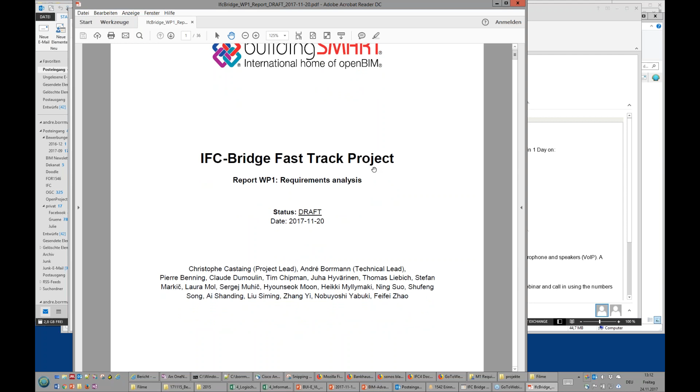Sorry, so this is the document that we have created as a result of work package 1, the requirements analysis. We have worked on it throughout the last month, so it's still changing, as we take into account the feedback that we are receiving, also from you as the expert panel. We are still in a draft mode, but we hope to finish this report very soon.

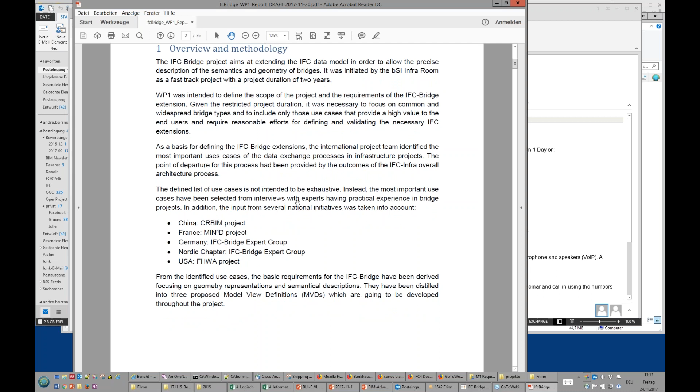So first, the document talks about the methodology and the overview of the IFC Bridge project. It talks about the different national initiatives used as a basis for this international project, both from the viewpoint of developments regarding the express schema, but also with respect to organizing feedback for developments that we have developed here.

We then define the bridge types covered by our project here. We focus on slab bridges, girder bridges, frame bridges, rigid frame bridges, and culverts. We believe that our extensions will also be sufficient to describe truss bridges, arch bridges, cantilever bridges, cable stayed bridges, and suspension bridges. However, because this is a fast-track project with limited time and also limited resources, we decided...

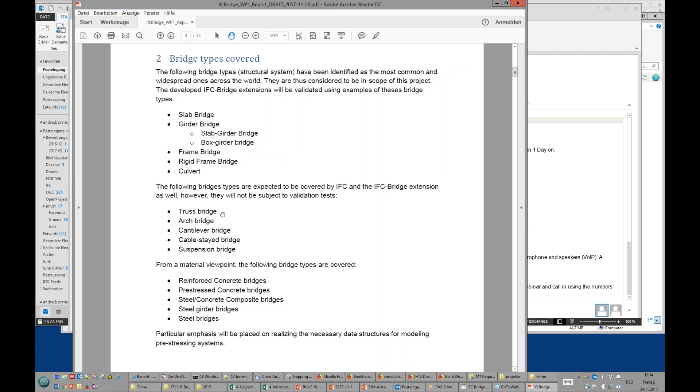...to not do validation tests for these kinds of bridges. So these bridges here in the upper part, we will create validation test examples to show that our extensions are able to support this kind of bridges, but not for the lower ones, because these ones are also not as widespread as the ones above.

So, from a material viewpoint, we will support reinforced concrete bridges, pre-stressed concrete bridges, steel and concrete composite bridges, steel girder bridges, and steel bridges.

Then we have quite a comprehensive list of use cases. These use case tables have a number, the use case as a short description, the purpose, so why do we need this use case, the actual IFC exchange scenario, so who is sending IFC data, who is receiving IFC data, which applications, and then a short and quite rough description of the geometry representation required and the required semantic information.

So of course, especially with respect to the semantic information, this is by far not complete. In the end, we will have a very fine-grained list of this information for individual elements in our bridges.

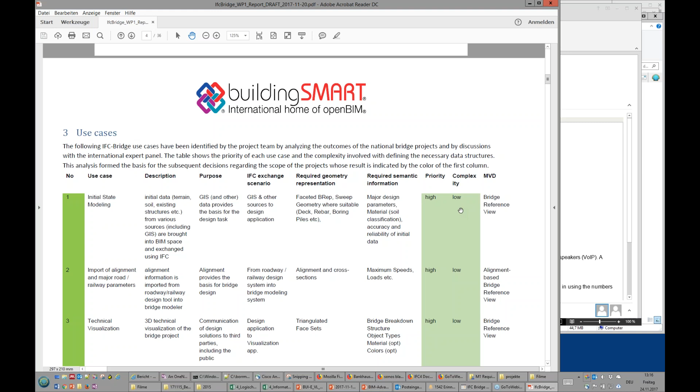This is to just define an overview of information that is required here. We then have decided on priority, so will this be included in this project or not. If the priority is high, then it is most probably included. We also assess the complexity of the different use cases, especially with respect to the required extensions and also with respect to the geometry needs. And from these two fields, actually, the decision is taken whether to include the use cases in this fast-track project or not.

What we also have in the table is the proposed MVD. I will come back to this later on. But in general, the MVD will be a model view that we define within our project, which then has different demands with respect to what kind of information is supported by the receiving application and the writing application. Like, for example, alignment is a specific extension of IFC, and whether to demand support for alignment or not heavily depends on the use case. So we here make use of the MVDs that we describe later on for each individual use case.

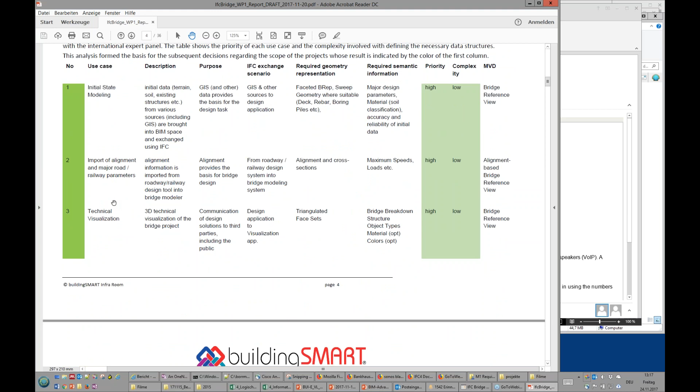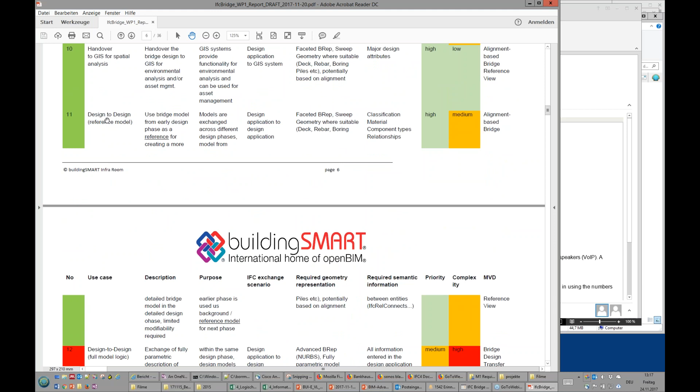So what we have as use cases is initial state modeling, import of alignment and road or railway parameters, technical visualization, coordination and collision detection, 4D construction sequence modeling, quantity takeoff, progress monitoring, as built versus as planned comparison, handover to asset management, handover to GIS for spatial analysis, design to design, but here only as a reference model, so something that is not modifiable is included. Design to design with the full model logic, including all the different parametrics and dependencies, is not supported because the complexity is too high. Design to construction is included with medium complexity, but high priority.

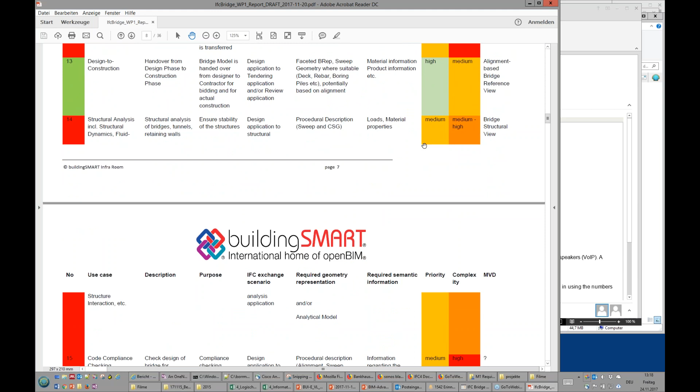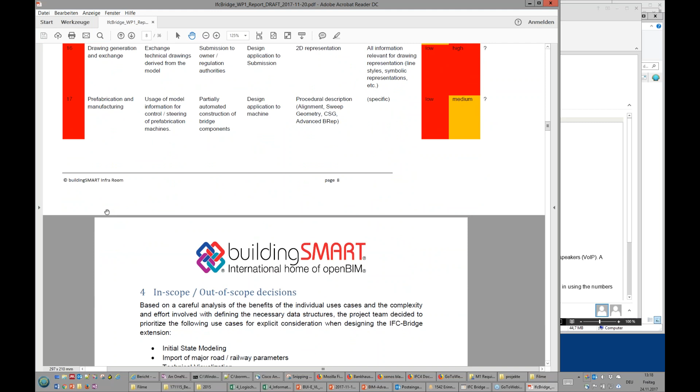We are not including structure analysis because here the priority is medium and the complexity is medium to high. Also, code compliance checking is not included. Drawing generation is not included. Prefabrication and manufacturing is also not included here.

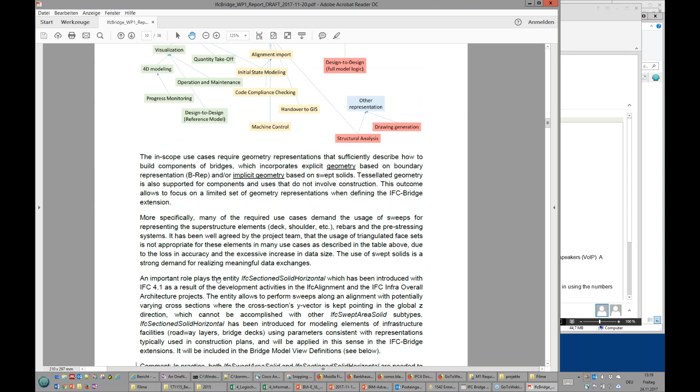So in the next part, the in-scope and out-of-scope decisions are kind of explained in more detail. And then we have a section on geometry, and we explain what kind of geometry is required for which use case, how the dependencies are, and what exactly for example the use of sweeps means with respect to the geometry to be supported, like IFC sectioned solid horizontal, or swept area solid, and so on.

So the next is the definition of the model views. Here we have defined, as I said before, 4 different model views with different demands regarding mostly the geometry, but also the semantic aspects. The most basic one is the bridge reference view, which will be very much aligned with the IFC 4 reference view, which has only explicit geometry, which supports mostly the use case of visualization and coordination and quantity takeoff. So this is also usable here.

In addition, we have defined the alignment-based bridge reference view. This reference view will make use of alignment for positioning and orientating of individual elements, but mostly will still make use of explicit geometry to describe the surface of the different elements. Then we have the bridge design transfer view, again very much aligned to the IFC 4 design transfer view, but here again with support for alignment.

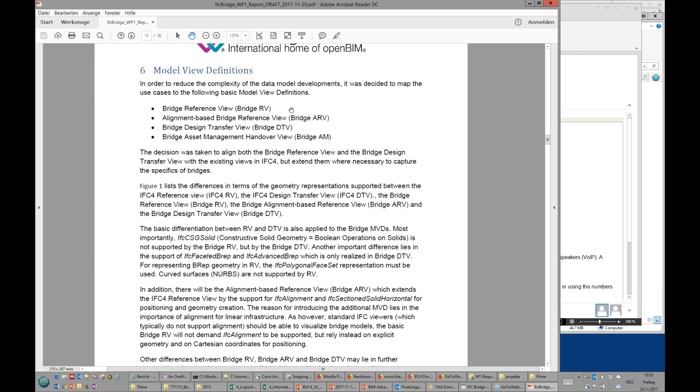And finally, we have the bridge asset management handover view, but here we did not define yet the content, so this is something we will have to work on in the future. This part here describes what actually is included in the different views. I will not go through this because we do not have that much time today, but of course you have this, it was distributed with the document.

And then we have this table here, which shows you, well, I would say the most important components of the different model views. Most importantly, we have here the already existing IFC4 reference view in white, and IFC4 design transfer view also in white, and in orange the newly defined reference view for the bridge, the alignment-based reference view, and the design transfer view. You can see that the reference view is pretty much aligned with the IFC4 reference view, and the bridge design transfer view is aligned with the IFC4 design transfer view. However, we have some differences here, for example, with respect to IFC sectioned solid horizontal, which is supported by the alignment-based reference view, but not by the bridge reference view.

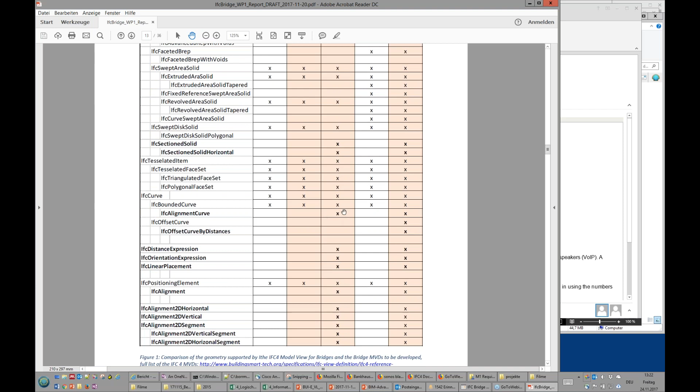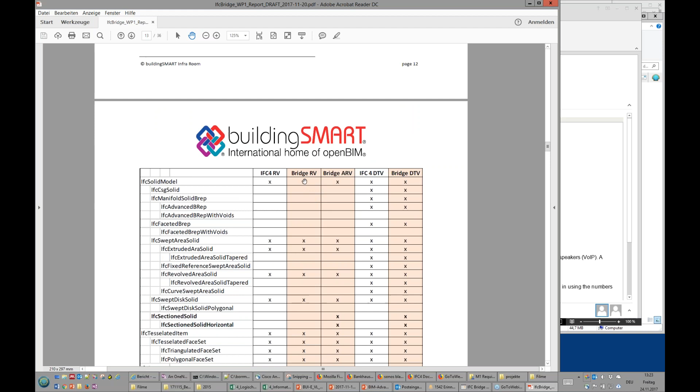So here we have a difference, and of course also a difference with respect to the alignment curve, the distance expression, the orientation expression, and the linear placement, because these are all elements required for alignment-based geometry descriptions. The alignment itself is only supported in the bridge alignment-based reference view, but not the reference view. So you will be able to open and visualize our bridge models in the bridge reference view, also if you have a conventional IFC viewer which is not capable of supporting alignment. This is important to have this kind of downwards compatibility with existing elements.

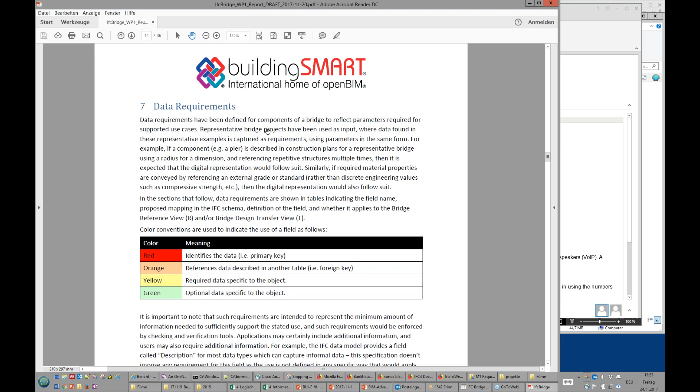Then we have a very long section about data requirements, where we started to identify for individual items what are the requirements for the different components of a bridge with respect to the different attributes. We use a color scheme where red means this is the primary key of an element, orange means a reference to data in another table, yellow means required data specific to the object, and green means optional data. So let's have a look at this.

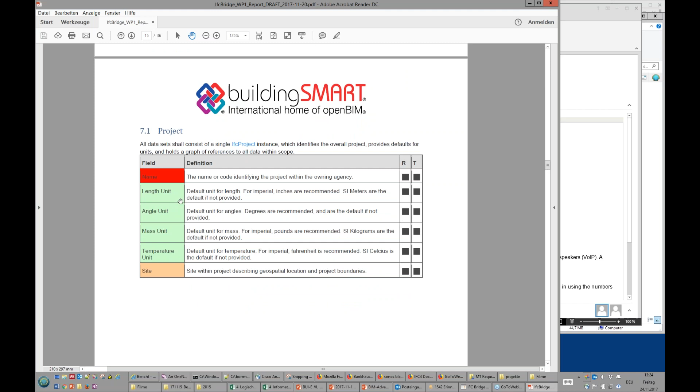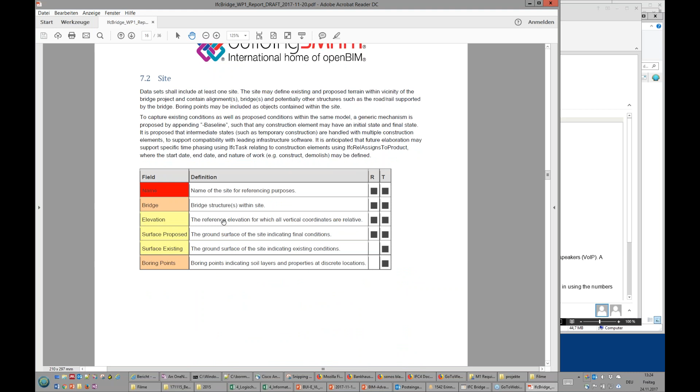We have here the project with a number of green elements and also an orange element. Green means optional, orange means reference object. We have the site object, which has the elevation, the surface proposed, and surface existing as mandatory elements. We have the alignment itself, the bridge itself, the piers and abutments, the footing, the pile, the bearing, the girder.

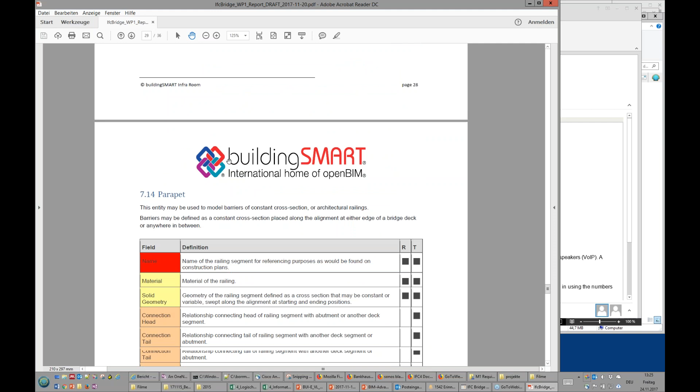Segment, the cross frame, and the deck segment, the parapet, electrical box, the rebar array, and the rebar shape.

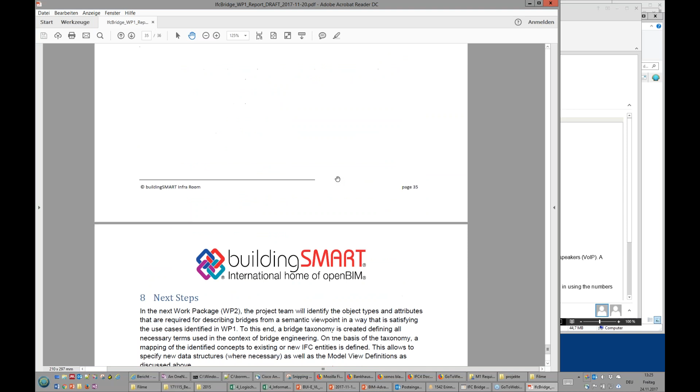We will also include, this is not included here, but we will also include information about pre-stressing systems. It's not in this version, but it will be part of the next version. Then we have the soil boring point and material information, traffic lane information, and that's it for the moment. We still need to harmonize this view with the taxonomy we have already created for work package 2. So it's not yet completely final, but it gives a good overview of what has been done so far and the requirements we have defined so far.

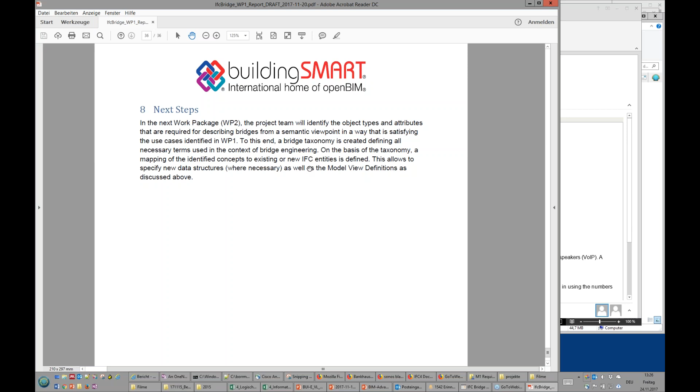So the next step will be to use these elements we have defined here and go forward to define the model view definitions and the actual extension in more detail as part of work package 2. Okay, so this is the short overview of the requirements analysis, and I'm happy to answer any questions that might arise about this.

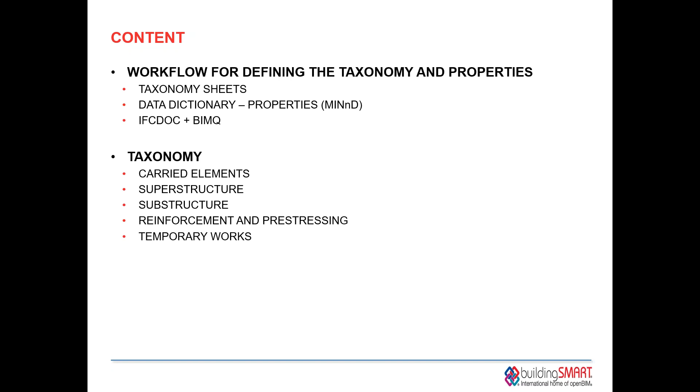We did receive some feedback on this from the Japan chapter and from the Nordic chapter already. Thank you for that, it's very good input. But even though we are currently not yet considering the systems or spatial structures or whatever should be used, in the end we will definitely be using feedback for that also.

So let me just jump over quickly how these things look like. We had taxonomy sheets, we have the data dictionary from the MINnD project, and then we are using IFC doc for concept template definitions and for documentation generation, and we're also using BIMQ as the platform where we will map the elements from taxonomy that I will be showing next, and IFC entities in the end, which will be then also used to generate an MVD XML and used as a basis in IFC doc to generate the documentation.

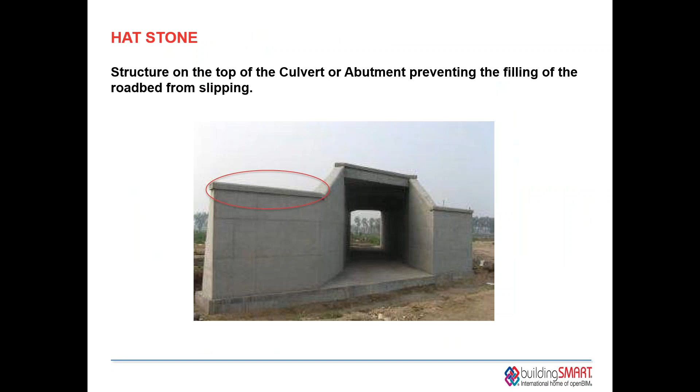I'm sorry about that, my computer just went crazy. In any case, let's just start again here.

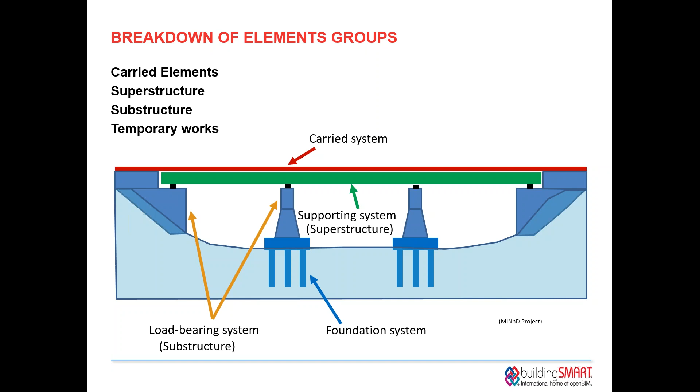How we see the breakdown of elements in groups is approximately this. We have a carried system, which is not part of the bridge structure, so should not be covered, is out of scope of this project. And we have a supporting system, the superstructure. We have the load-bearing system, which is the substructure, and we have a foundation system. This is taken from the MINnD project. It's by no means a final version of how an IFC file should look like, but it's definitely useful to be considered as such.

So let's go to carried elements. At first, as I stated, our in-scope definition would be something like this. The bridge is a structure built to span physical obstacles without closing the way underneath. So everything that can be grouped under this basic definition is in scope from our point of view. Anything that does not fit into this basic definition should be out of scope.

So anything like sign systems, safety systems, drainage, carriageway, and so on is not in scope of IFC bridge. It's definitely needed for IFC bridge, but we should look to other projects to define this or use the existing schema to define these carried systems.

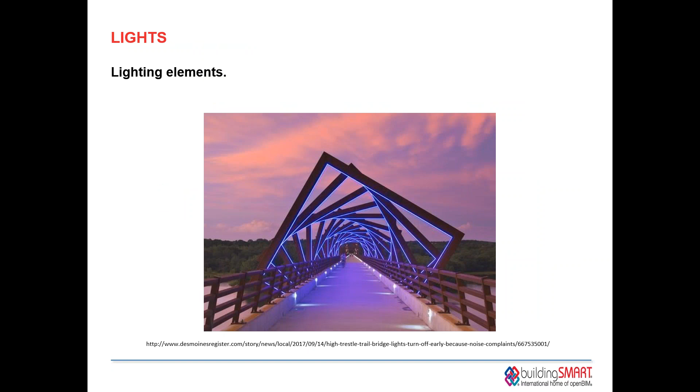I have a few examples here. It's something that should be used in the common schema project also, so we're happy to transfer this information to the common schema later. But before we start with this one, this is what I was looking for.

With a superstructure, let me just address the survey we had sent out. So we had a special survey, and we got some information regarding that, where we basically just asked you experts of what you actually want from a bridge model. What objects do you see as part of a bridge model? These were then defined here in this presentation as pictures and a short description, and you were asked to give us feedback if this is something you see as part of the bridge model, or if you see it as part of the common schema, or part of the road, part of rail, and so on.

Because this is something that will be used to define our extensions to the schema eventually.

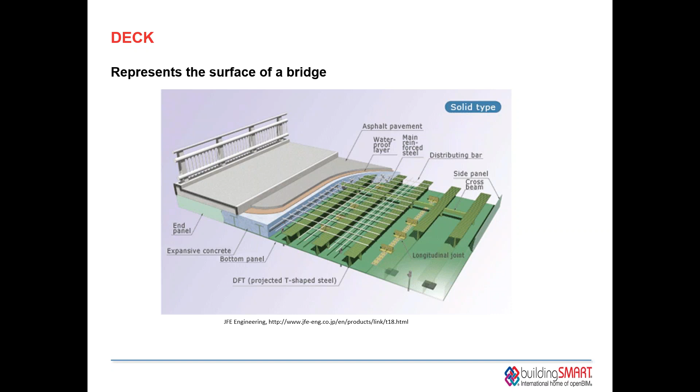This next part, I would like some input from our experts, where Laura will start a poll. We will look at the elements there, and you just click on the ones you see as part of the bridge model when you're receiving data. What do you see as the objects that should come in this model?

So did we start the poll? Yes, every expert should be able to see the poll now. Can I see it also, or am I missing something? Maybe, I'm seeing it, but it could be because I have different rights than you. Okay, but I can let you know. They're giving their answers now.

Which objects do we have listed in the first poll? Deck, girder, diaphragm, truss - I'm not even sure how to pronounce that last one. Parapet? Yes, parapet. So these are the first five I would like some feedback on.

So a deck represents the surface of a bridge. Girder is a horizontal support beam. Diaphragm - some feedback from the Nordic chapter told us that we might want to rename it to cross beam. So either diaphragm or cross beam, whatever suits you best, as long as we know what we're talking about.

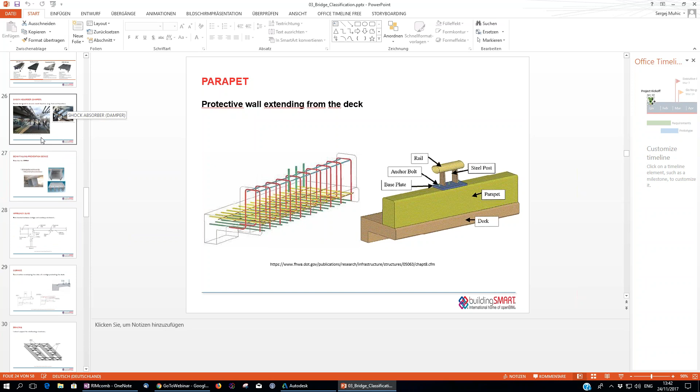Okay, so we're going on to the second question by Sergej, and it would be about expansion joint, shock absorber, beam falling prevention device, approach slab, and cornice. As soon as I launch the poll, it'll take over your screen. So do you want to go through it first and then answer the question? Yes, let's go through it first.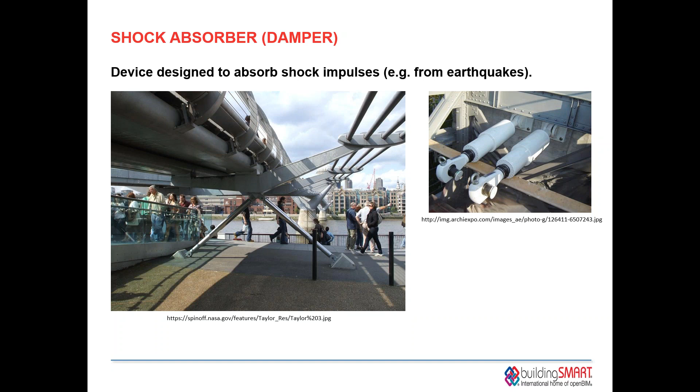What we would like to know here is, do you see an expansion joint, which would be, from our definition, an assembly connection between construction elements to allow for thermic differential expansions? The shock absorber damper - we're still considering this because we already have some special elements designed for that, how to group them or what the super class should be regarding this. So the device designed to absorb shock impulses.

Beam falling prevention device - I guess it's a device to prevent the falling of beams. Slab located between bridge and roadway abutments - we already have some feedback from the Nordic team on that also, which would be that it should be grouped under substructure, since it's a part of abutment. Not that important currently, but definitely important when we continue with the project. And the last one was cornice.

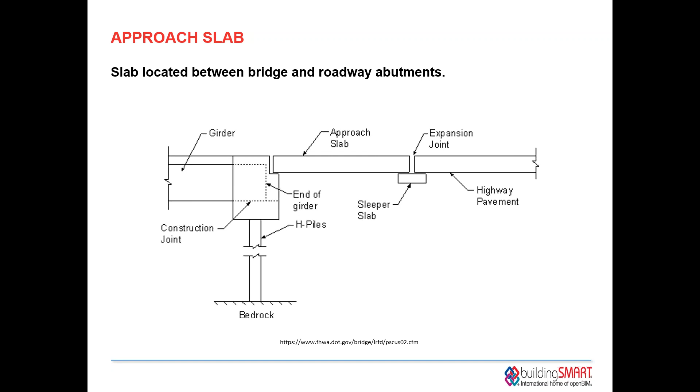And the last one was cornice - this bridge shoulder part, or how to call this exactly here. And I would just start the poll. So do you see these elements as part of the bridge model or not? Let's just open the poll. The poll has been launched.

So please, could you let Sergej know if information on these elements would be needed when you receive a file on bridges? People are filling it out, about 17% have voted. Let's give them a couple of minutes. I will leave the pictures open here, maybe make it bigger.

If there are any questions, we can probably still answer them during the poll, right? Yes, of course, so you can also raise your hand if you have questions. So if you're not certain about an element, please ask.

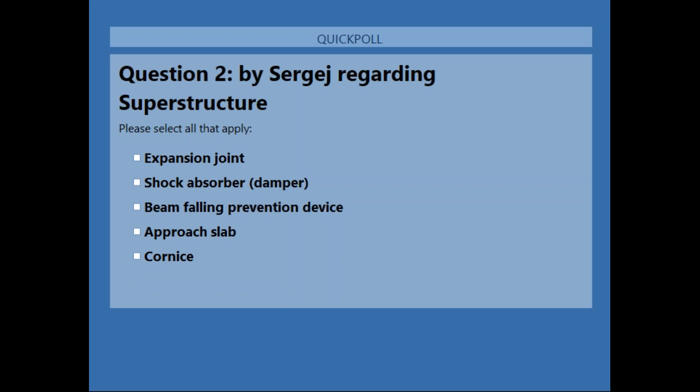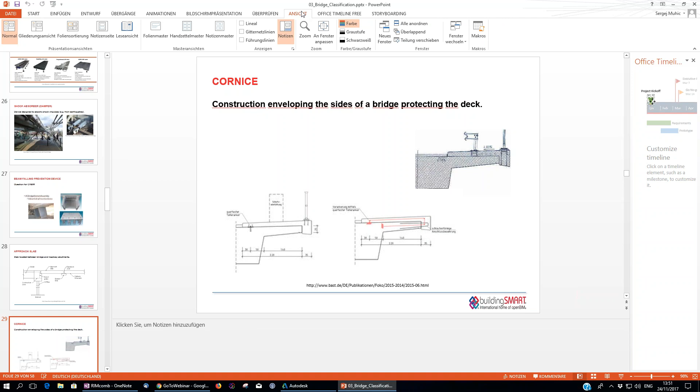The third poll is about bracing and strut. Is there someone in your background talking, Sergej?

Yes, there is. I'm sorry for that, but I cannot remove myself from the office. It's okay, I was just wondering where it was coming from. Don't worry, just a second. Okay, so cornice and brace—no, we had bracing and strut, right? Sorry, yes, bracing and strut.

Looking at bracing, this would be lateral support for structures generally, and struts, linear elements used within a girder or truss as compression elements. So these would be these diagonal compression elements over here. Would you see these two elements as something you'd want from a bridge model when you receive it, or is it not important?

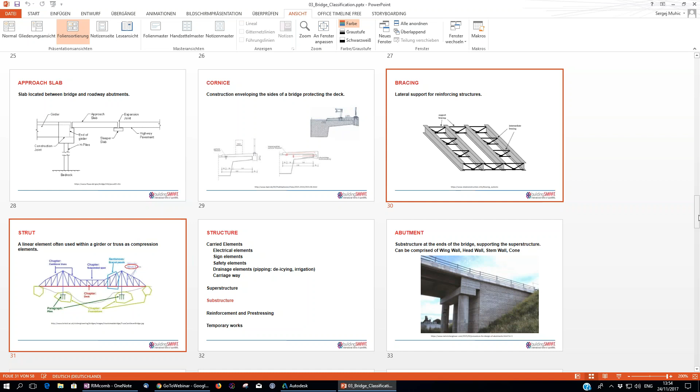So the next ones are about abutment, retaining wall, bridge apron, arch, and bearing. Abutment through to bearing.

So let's quickly go over the elements here. Abutment: substructure at the ends of the bridge supporting the superstructure, can be comprised of walls, basically wing walls, head walls, stem walls, and also cones. This would be more or less an assembly of different walls acting as the support at the ends of the bridge.

Going further to retaining wall, this could also be a separate element, of course, and it works a bit differently than a normal wall.

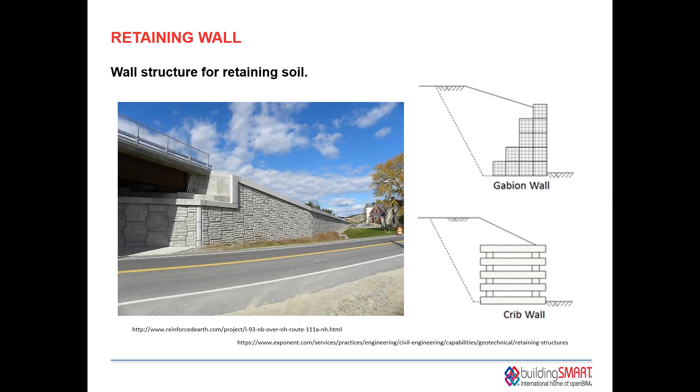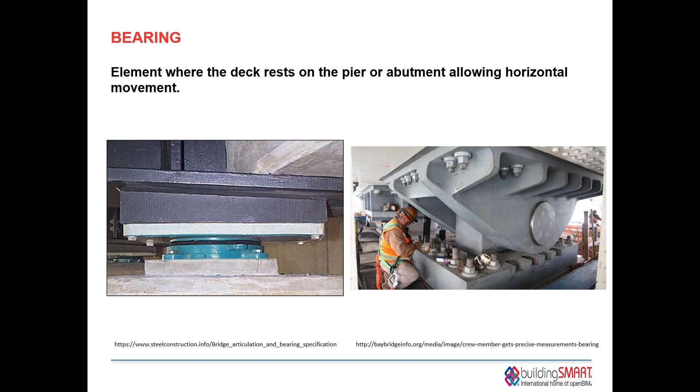And we also have arches, which would be structural elements of an arch bridge. And the last one, bearings: elements where the deck rests on the pier or abutment, allowing not only horizontal movement, but movement in general.

So the question here again: when you're receiving a bridge model, do you see that these 5 elements are required, or do you not need them when getting a bridge model?

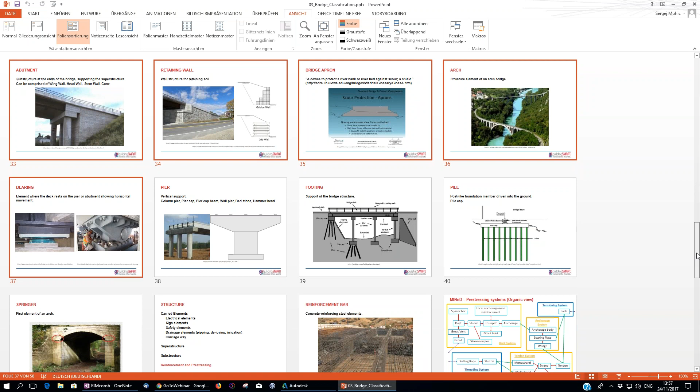Would you like me to share the outcome of it, just to show everyone what it looks like? Sure, why not. So I don't know if you can now also see it, Sergey. Has it taken over, or? Unfortunately, I don't see it. Can you stop sharing your screen for 1 second to see if that would help? Let's do that. I cannot really stop sharing my screen. I only have a pause button, but that one just freezes the screen. Let's not make it difficult.

Continue. So the next elements are pier through to springer: pier, footing, pile, and springer.

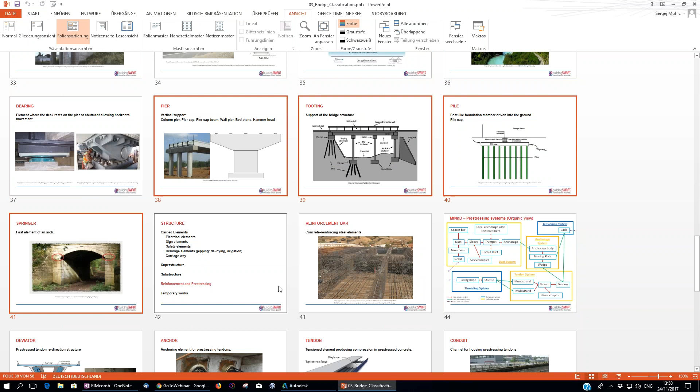Let's go over these elements again quickly. Piers, what we understand as piers, are vertical supports. Elements that we see also being part of the pier are cap beam, wall pier, bedstone, and hammerhead.

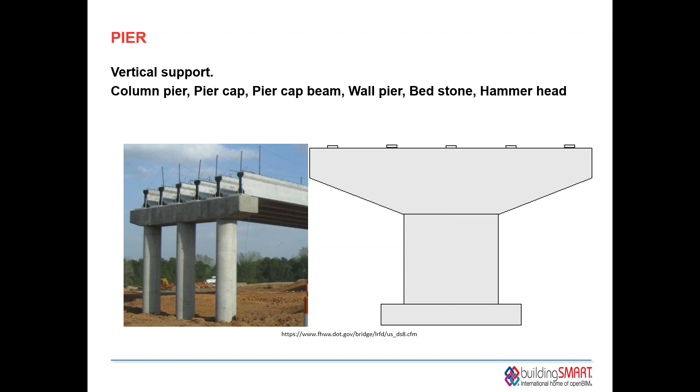Next one, footing. This one's pretty obvious, support in the ground usually. Then we have piles, which would be foundations driven into the ground, so deeper than normal footing, and we also see pile cap on top of them to connect them.

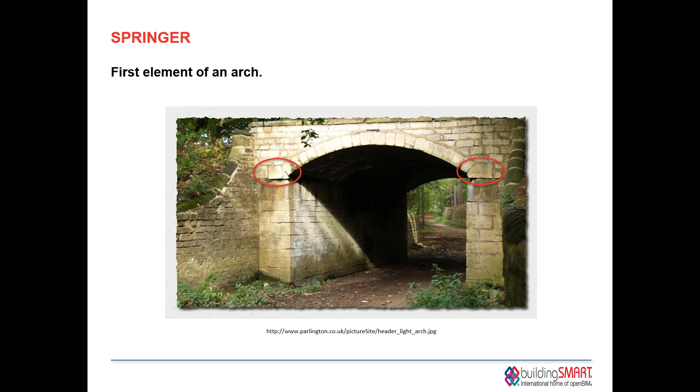Next, springers, which would be these elements here, the first elements of an arch. I'm not sure if these are still in use in modern bridges, so this is definitely something I would like to see some feedback for. Or if they are, then I would appreciate getting some feedback in images or maybe breakdowns of how these elements are structured, because I really haven't found anything useful on the internet apart from this old bridge here.

So again, the question is, when you're getting a bridge model, do you see these elements as required? Do you need information on them or not?

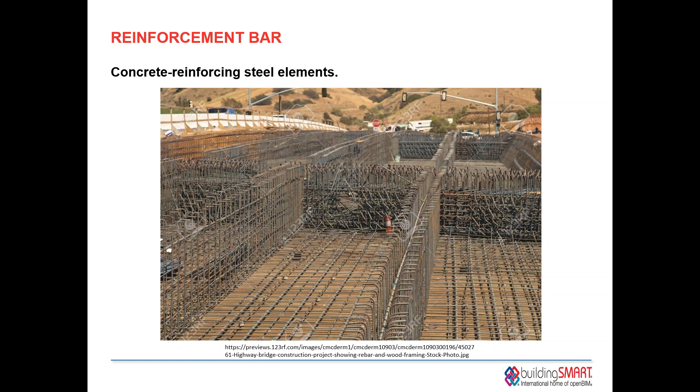In this group, the reinforcement and pre-stressing group, I mainly gathered elements that are used in reinforced concrete or pre-stressed concrete. There are, of course, probably several more. That's why we also had a breakdown in the next image, which I will show. Reinforcement bar, these are obvious, I won't go into further detail, but this image here, for example, is a lot more complicated.

Thanks to MINnD again for this breakdown, it's very detailed. But just to have an overview of how detailed pre-stressed systems could get, would you require this kind of detailed breakdown when receiving an IFC file? This is the main issue here. So for pre-stressing systems, just having this extremely detailed breakdown, is it necessary or not?

Just a general question, yes or no. And if you say yes, then I would ask you to send me your view of how detailed a pre-stressing system should be. Because what we do have is, okay, these are special elements for pre-stressing, so deviators where we redirect the tendon with a particular structure.

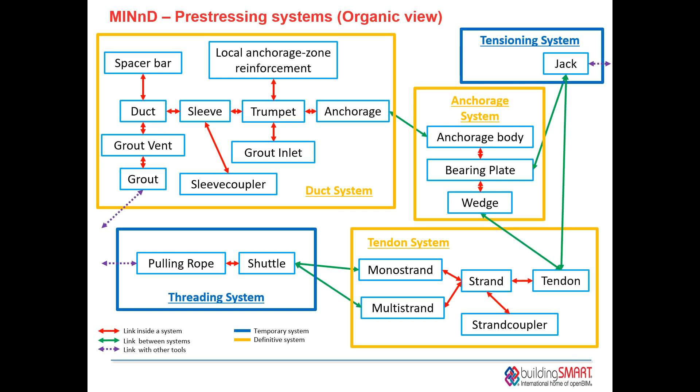Then we have anchors. For example, this would already be possible to model in the current IFC schema, but is it enough to just have anchors and tendons, or would you really like these detailed breakdowns in a bridge model? This is a very important issue, and if you really see such a detailed breakdown to be of benefit, please tell me what your view of this would be.

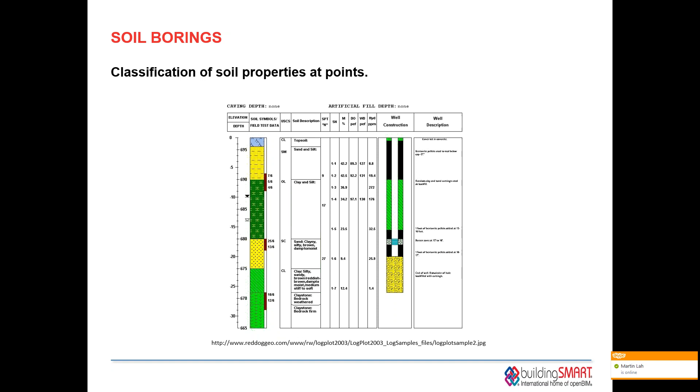We can launch. Okay, it's already open. Sorry. No worries.

I think even if someone has different exchange requirements than what we're looking at here and doesn't leave out the question, I think we should still have a firm grasp of what's required and what's not.

We're up to 63%, and not everyone might vote on this because it's not as important for everyone, as you said before. Right.

Unfortunately, these polls in GoTo are not as flexible as the ones we sent out before, where you can leave your own comments. So it might not be the best outcome, but still better than nothing, and any input will do. They do have a questions panel where they can add questions, and you also have a chat. So if you want to provide any other feedback, please feel free to do so.

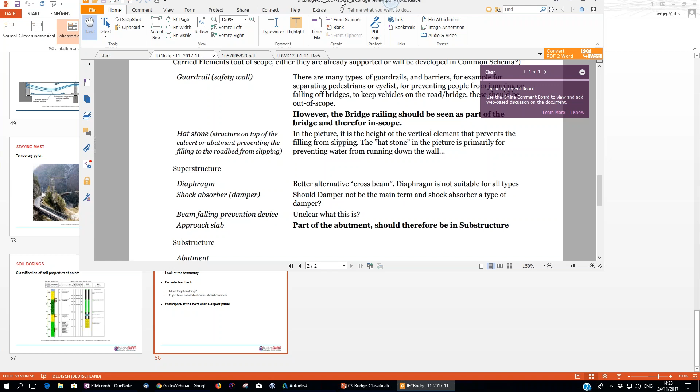Where they specifically go into certain elements, give us feedback, and if there's anything we should consider, we will definitely do so. We will study every documentation sent, every report sent. So don't be shy - send us everything you have.

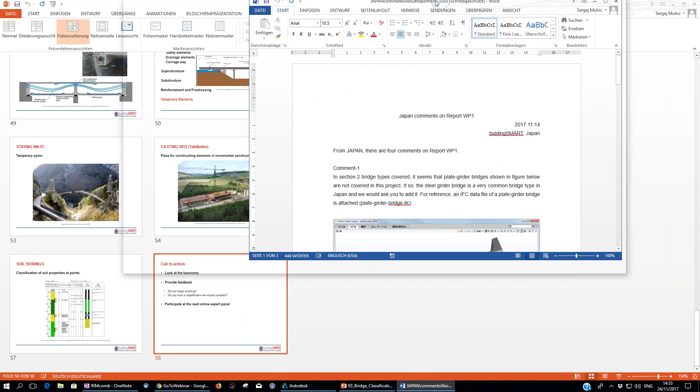There's also a report from the Japanese chapter they sent, regarding the requirements report - we'll definitely study this. Unfortunately, we haven't had the chance because we only had a project team meeting yesterday, so the comments here have not made it yet into the report, but it will.

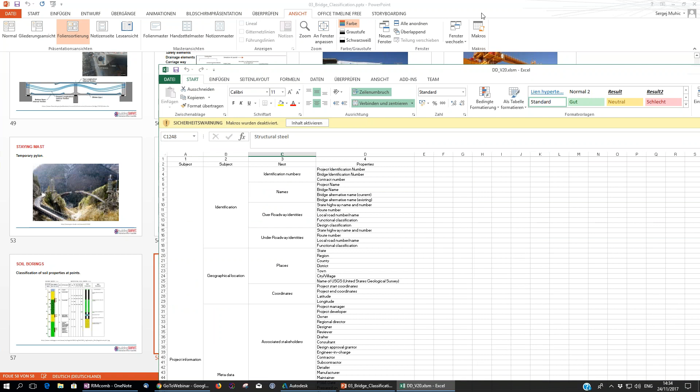And one more thing I would like to quickly go through is the properties data dictionary from the MINnD project, where we have a list of properties, and because this is the most comprehensive list we have got - actually it's kind of the only one - we are basing our models for semantics on this list. But if you have anything you would like us to consider regarding properties and their assignment to elements, please send us that also. We will be looking at Omniclass, Uniclass, of course, the standards available online.

Those classifications are easy to access, but if there's anything that we should consider and haven't found yet, please let us know. We will definitely do so and try to get as much of your input into the new developments as possible.

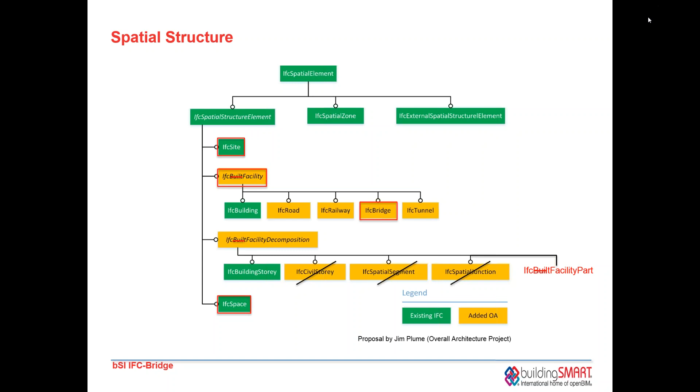We are proposing not to call it IFC built facility, but instead IFC facility. With respect to the actual facility decomposition, we also propose not to call it built facility decomposition, but just facility decomposition. Then we would have building story and IFC facility part as a subtype of this. It's kind of hidden here due to my windows, let me try to remove this. Maybe you can see it better here. So this is the facility part, which would be a new part here, having more or less the similar meaning as IFC building story for buildings.

A slightly different approach would be that we do not have the new super type IFC facility decomposition, but instead directly have only facility part and building story. This is still something to be decided. It's not super important, but maybe it's easier for software vendors to implement.

Then we come to the actual spatial structure of a bridge. We propose that we have two parts: the substructure and the superstructure. Both would be modeled as IFC facility part, and we propose new predefined types for superstructure and substructure. We would also have a new element IFC bridge, and the rest is more or less the same as for buildings. So we have the project, which aggregates a site, the site aggregates a bridge, which then aggregates the two facility parts: the substructure and the superstructure.

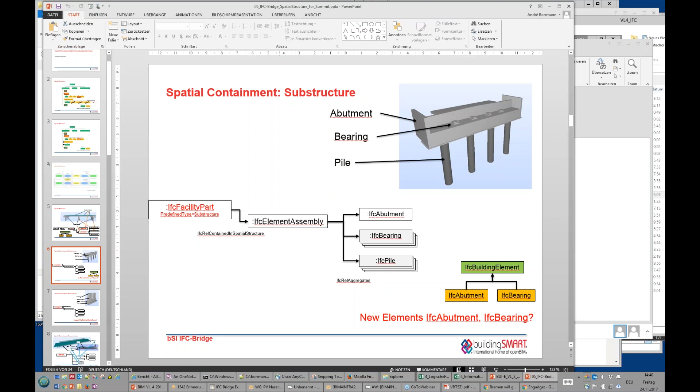We have here the same for the middle part of the substructure. Again, we could create an assembly for this. Here we also have IFC bearing, which might be a new element for the IFC data structure.

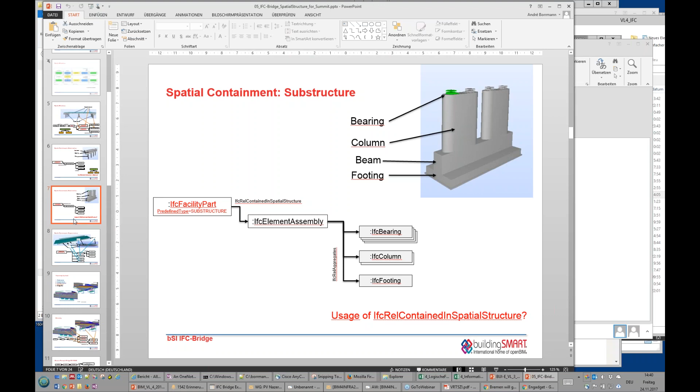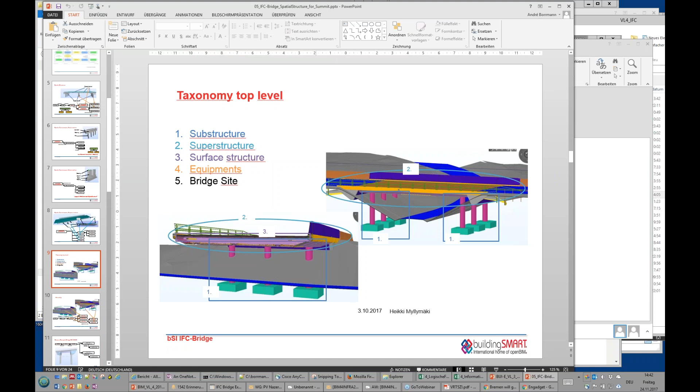Here's one slide from the Finnish chapter, again using a bridge and describing the different parts. In this case it's the substructure, the superstructure, the surface structure, the equipment, and the bridge site as a whole for the entire project. Here we see how the facility part is used for the individual elements, for the surface structure, the superstructure, and the substructure, and you can see the different elements here. Also the element assembly for bridge pier is included here.

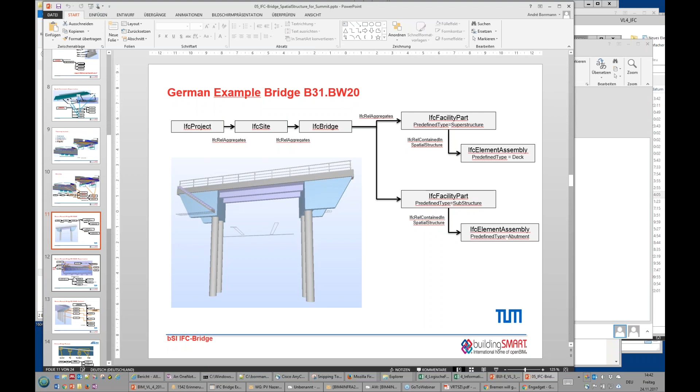Here's a German example, again using project, site, and bridge, then using IFC facility parts to describe the deck and the abutment. It's basically the same approach as in the other parts. Here we have the question of the correct term, bridge cap. We already know it's not correct. Instead this would be the parapet, exactly this element here, which can be modeled using existing types and assembled into the deck. So we would have the entire deck using one assembly here, and this is then embedded in the facility part.

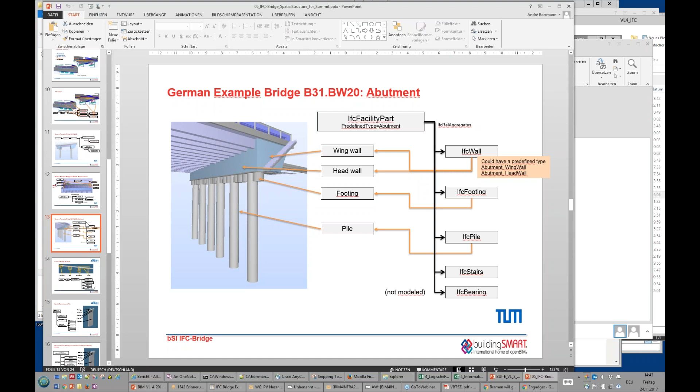So this is maybe an important message here, that you are still free to have organizational guidelines or national guidelines on how to use the different elements for composing the bridge. You don't need to follow the proposals that we are doing here. We just check if the different views are possible to be reflected by the data structures we define.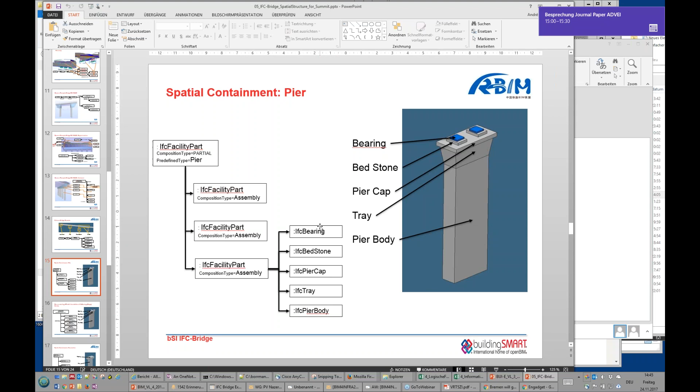For example, our Chinese colleagues, they would then make use of an assembly to describe the pier structure here, with a pier body, with a tray, with a pier cap, bedstone, and then the actual bearing. We do not necessarily need for all these elements new IFC elements, but we will make use of existing structures to the largest extent possible.

Yeah, this is again other possibilities to model this. And that's all I wanted to show you about using the new facility part. Maybe one thing that I missed is that the facility part can have itself included other facility parts, so this can be repeated, limitless. So you can have these nesting structures where facility parts compose facility parts, compose other facility parts, and so on. So this is a very flexible structural element that can be used in any way you want.

Maybe one question to the expert panel that we could discuss here is whether the picture that's shown here fulfills your needs with respect to the spatial structure of a bridge, or if you maybe have another view on it where we need additional elements in the spatial structure. Any comments or discussion about this?

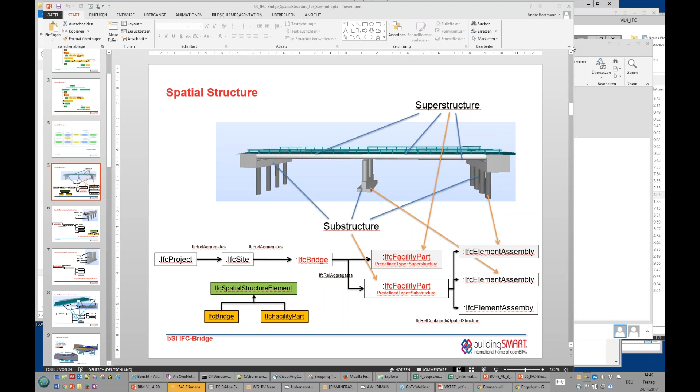So if we had time, we were going to discuss maybe some properties, get to some more questions. I don't know about you, Andre, how would you like to continue this meeting? Because we're already getting close to 3 o'clock. I propose - I think we have already discussed the most important parts, so maybe we can shortly discuss how we want to proceed with the properties. I think we do not have to run through all the properties, but maybe Sergej can just present our approach of handling the properties using BIMQ, and maybe shortly also present how these properties then will be fed into buildingSMART Data Dictionary and can be accessed by software vendors.

Yes, sure. Just a quick guide to how we are handling properties.

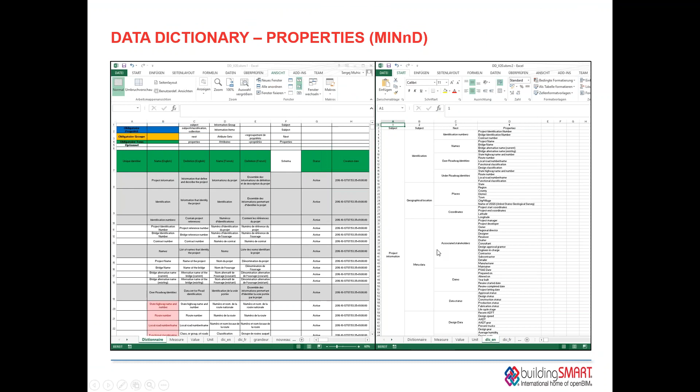So first of all, we are gathering input data, such as the data dictionary from MINnD that I showed before, where they have property sets defined and assigned to elements already, or to groups.

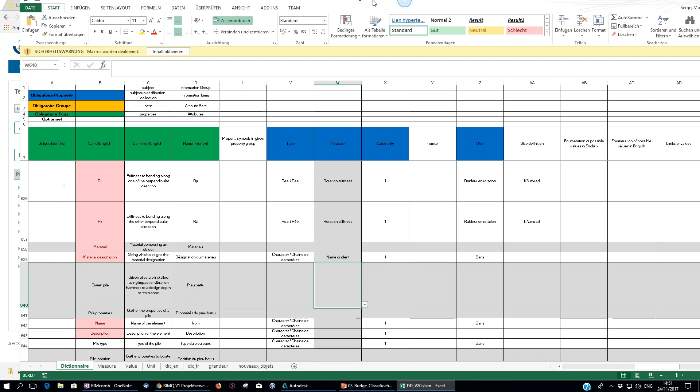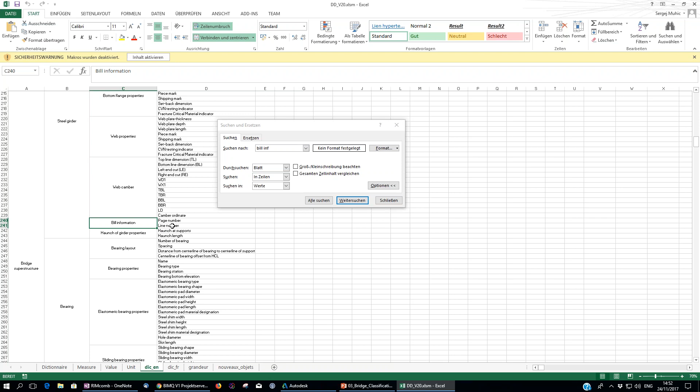And these will then make it into BIMQ, an online server where we can import the properties. For example, this is the MINnD property set that we got from the MINnD project. You will see that the groups, such as let's find the first one that we already have here. For example, bill information, page number, bill information would be the P set, page number, line number are the properties inside this group. So we imported this to the online BIMQ server, and these properties are then listed here.

The taxonomy is also available. The taxonomy with this basic breakdown that we have was also defined in BIMQ, and what we are doing next is combining these two separate lists, elements and properties, into our requirements.

And for example, now this is probably not the best example since we just got feedback that Approach Slab is maybe not the best naming for this. But for example, we can then just assign the property sets to these elements. Let me just quickly turn off description.

These properties then get special units. These are not yet filled out because we haven't defined the data types yet, but we will do so eventually.

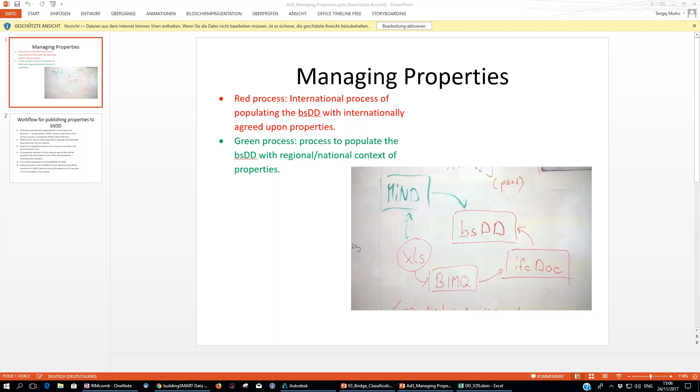I propose that we, as Building Smart International, give some examples and maybe also advice on how to use the data structures. And of course, we define the data structures, but how you would like to use them in your project is then up to the individual authority.

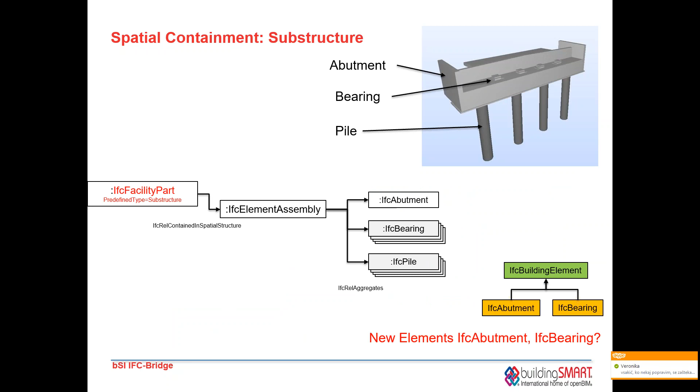In our proposals, the footing or foundation itself was not like an extra element on an extra facility part, but we modeled it now as being part of the substructure. So in the substructure, you have elements like the pile, and the pile is part of the foundation system. In this case, the pile is part of the element assembly composed of the abutment, the bearing, and the pile.

But if you have other proposals, it would be nice to also see an example from Karin of how they want it to be modeled. Okay, Karin, could you please provide examples of how you would want to see that modeled?

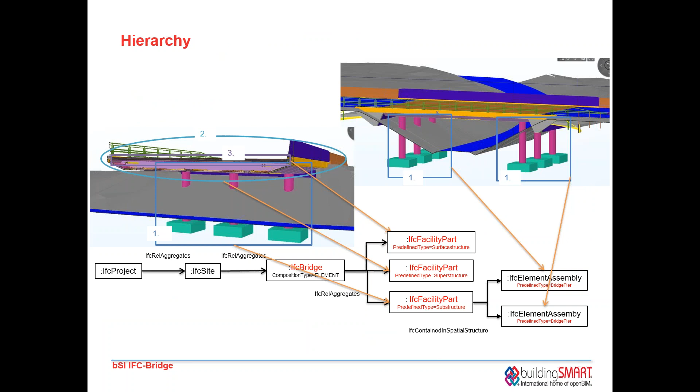She had one more question she missed earlier. Did you talk about the specific bridge railing as part of the bridge? This is something I only read today, that we have a specific railing for bridges, not only the railings next to the sidewalk. I think this bridge railing would have to be somehow clarified, or just the main requirements, or what is actually meant would be very helpful if we could get information on that from Karin. Currently I'm not sure if it's a parapet or some special railing, or what exactly this bridge-specific railing means.

Okay, I've added it in the chat. So Karin, could you please also provide more information for Sergey so that he can model it? I'm also getting a message from Andre saying he has to hurry along to a next meeting. So Andre, thank you for being here. I think we're getting to the end anyway, if no one else has any questions.

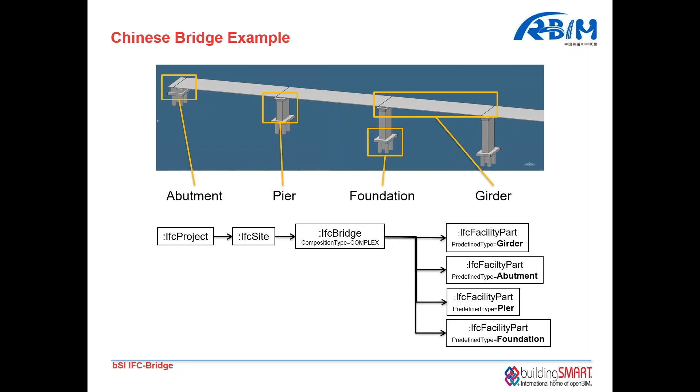Okay, thank you, Sergey, for that explanation. I don't see any more raised hands. I hope I answered the questions. If not, Karin should have my email address anyway, so we can continue the discussion. Good idea. So Karin, please feel free to contact Sergey, and you two can continue the discussion. Sergey's more than open to having a meeting if that's necessary, right, Sergey?